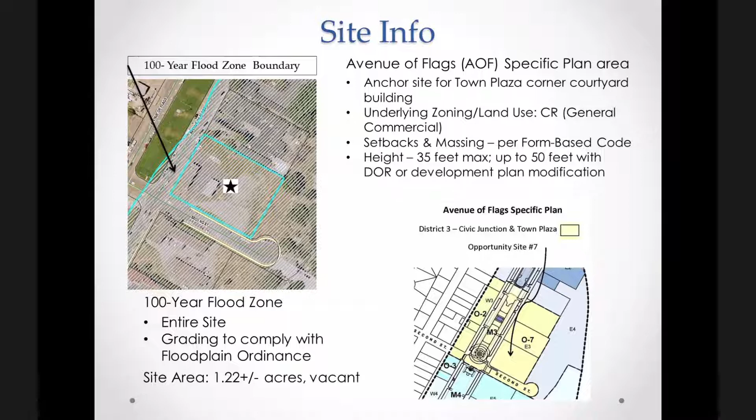So the project vision would be a commercial and residential community, providing a commercial retail presence on the Avenue of Flags targeted toward local businesses. The idea would be to serve the needs of area residents and the community as a whole, and also create quality multifamily homes with open space amenities in the form of a central courtyard, terraced roof decks, and views of the surrounding hills.

So upon our conceptual review, which is not a full review for compliance with the specific code, the project generally seems to be consistent with the Avenue of Flags specific plan and the Art Deco design style. Moving forward, we'll work with the applicant to refine those elements to ensure consistency with that plan. The project also does appear to complement neighboring developments.

Getting into project information, the project consists of 2 separate buildings, building 1 and building 2. I'll cover building 1 first. It's located immediately adjacent to the Avenue of Flags, closest to the street, and contains a corner courtyard mixed use building.

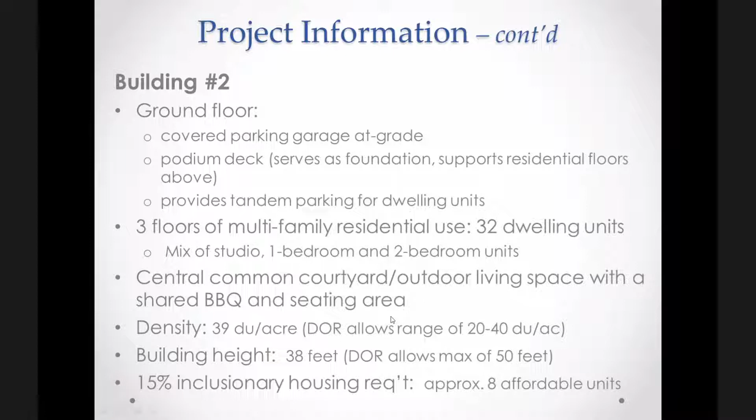The proposed density of the project is 39 dwelling units per acre. The DOR, or Development Opportunity Reserve, within the specific plan allows for a range of 20 to 40 dwelling units per acre. The building height proposed is 38 feet, while the DOR allows for a maximum of 50 feet. As for other project statistics, the 15% inclusionary housing requirement would apply, equating to approximately 8 affordable units required for this project.

Moving on to parking and access, surface parking would be provided, located behind the mixed use building fronting the Avenue of Flags, in the interior of the project and along the north and east property lines. There will be a combination of indoor garage parking in the form of tandem spaces, covered carport parking spaces with potential solar panels, and uncovered parking spaces. Per information provided by the applicant, the project would be required to provide 77 spaces for residential uses and 19 spaces for commercial uses, for a total of 96 spaces required. Again, staff has not done a detailed review for compliance with our municipal code and Avenue of Flags specific plan, but this is the information provided according to the applicant.

The project is proposing to provide 100 total spaces on site, and additionally to install 7 public parking spaces off-site, immediately adjacent to the project site on Avenue of Flags.

I'll show you that later on the site plan where that would be located, and it would be in the form of parallel street parking. The project as designed proposes 2 vehicular access points along 2nd Street. I'll show you that on the next couple slides here when I have the site plan available.

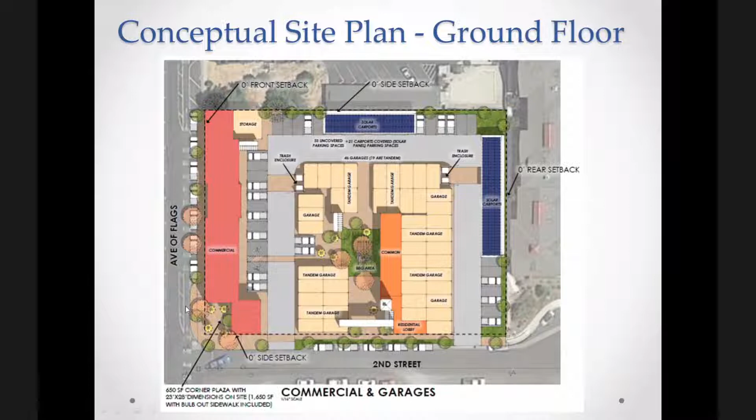So you can see in the center of building 2 the barbecue area, the public open space, and the project site does have some perimeter landscaping provided, and the corner courtyard on the corner of Avenue of Flags and 2nd Street. Let's move on to the next slide.

So here is the conceptual front elevation, the elevation you'd see if you were standing on the Avenue of Flags. I'll briefly touch on that. And the image at the bottom of the screen is a section, as if you are standing on 2nd Street, looking into the building.

I'll note a couple things here: the conceptual design as proposed does appear to attempt to complement the building approved on the Creekside Village project, which is on the other side, just south of this project across 2nd Street. You can take a look at that and what it looks like.

In terms of the section on the bottom of the screen, looking left to right: here's the Avenue of Flags, and here's building 1 fronting the avenue, with commercial on the ground floor, residential on the 2nd floor, and a roof deck on top, then the roof deck bridge connecting to building 2, and of course the drive aisle below.

So then you've got 3 stories of residential in building 2 and the garage and tandem spaces on the ground floor, moving back into the courtyard and open space for residents on the project site, and yet another roof deck provided in building 2. As you move back, you've got residential units on the 3 stories above the ground floor, with some garage space and tandem parking spaces as well.

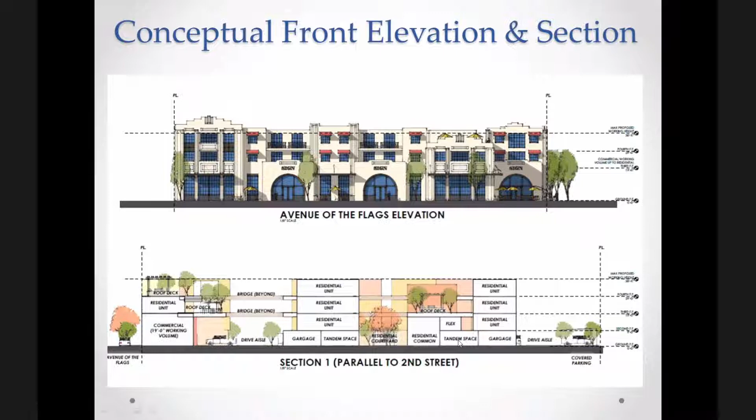So just some brief information on the Development Opportunity Reserve. As the project is conceptually proposed at this point, DOR incentives may be needed to address the increased residential density proposed above the baseline allowed, and potentially other items if applicable. Generally, some of the DOR benefits being considered include potentially contribution toward construction of Avenue of Flags specific planned public improvements and/or public benefits, and that's to be determined.

And really, the project specific terms for the DOR would be memorialized by a development agreement. If the project requires entering into a development agreement, this would require final review and approval by the City Council. So as some general information, this is the second project which would be requesting consideration under the DOR program, the first being the Creekside Village project just south of this.

So, permits and discretionary actions. The land use permit for this would be a final development plan, and a discretionary action that would also be required would be a development agreement to implement any DOR terms that would be necessary. Some potential other permits and discretionary actions, depending on the formal application we may receive, could potentially involve a tract map to subdivide the property if any of the units are intended for sale.

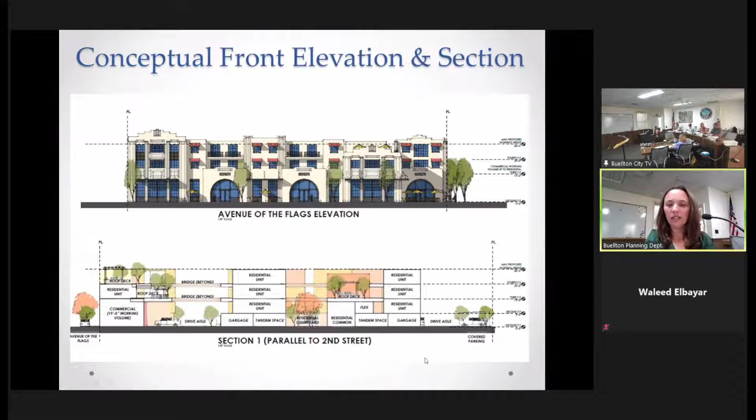My other question is about tandem parking, so I'll just turn it over to the applicant. All right, well, give me just a second here. I will share their PDF. So, let's see.

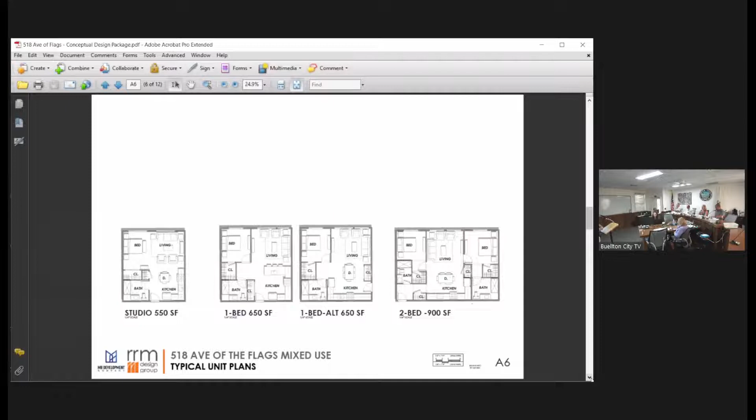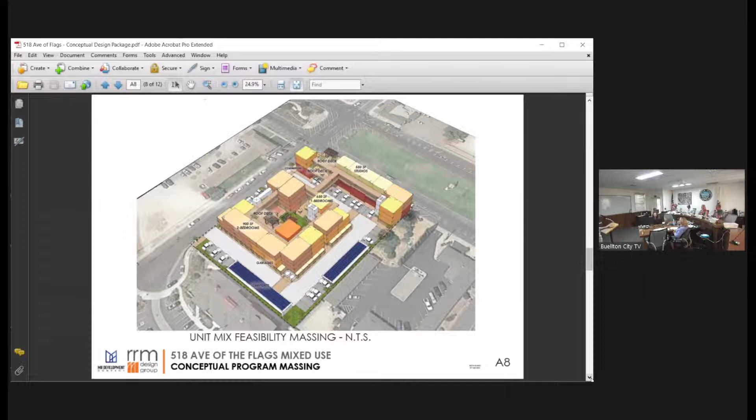You can go ahead and see that we have our outdoor plaza and also a couple opportunities where we think there might be some outdoor dining on a fairly large sidewalk. And then down on the left would be where the additional on-site or off-site parking would be. We didn't count the ones on 2nd Street for you, because they're already existing. We're not removing any, we're maintaining them.

Go ahead and hit the next slide. This takes us to our last slide before I show you the pictures. So this section really helps you see how that relates. Is everyone going to hear me okay if I walk up to the screen for you?

Under the bridge, as an architect, I have to point with my hands, I usually have a mouse or something. Right there is where we wanted to make sure that the utility trucks, I just want to make sure that was clear, because that's a really important thing when we design this. You can't just put a bridge in. You have to make sure that trucks are able to fully get all the way around, especially with our trash enclosures that meet your guys' standards in the back. We wanted to make sure that worked.

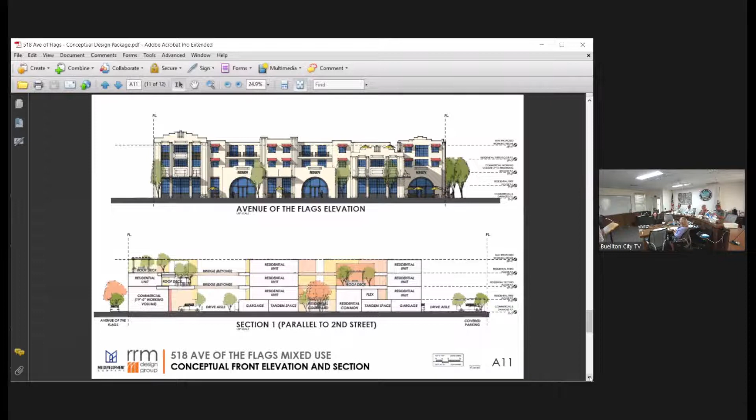We think it provides great amenities for people who want to live here. How great is it to be able to rent a 2-bedroom unit and have 2 covered parking spaces for you? We think it's a bonus rather than a negative to be able to have a tandem.

So, Brandon, I didn't know if you had anything else you wanted to say, but I feel like we've shared a lot, and I think it's probably time for you guys to have any of your questions.

I'll just quickly, before I turn it over, on the pedestrian bridges, out of curiosity, are those concrete? We'd have to look at our instructions on how we want to do them. Most likely it would have to be some kind of steel to be able to get the profiles that we need.

Because steel's so good in tensile, we're going to have to use steel. And at this stage, this is just the conceptual stage. Over the next many months, we'll be fine tuning the feedback and trying to see what actually works and gets buildable. But this is, I'd say, our first pass.

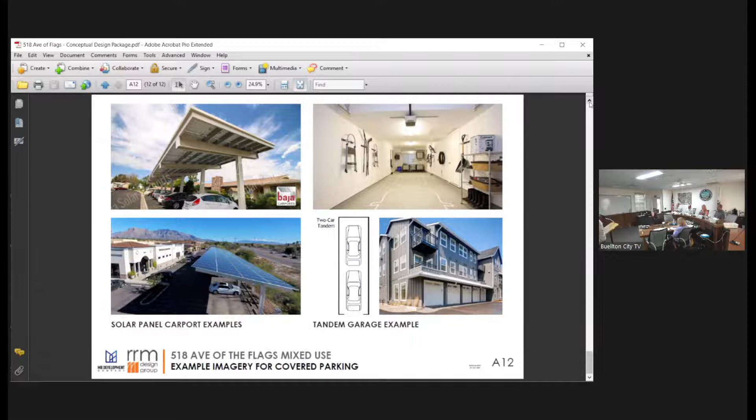We can encourage it in a couple ways. Our adaptable units should all be the closest units to that elevator. That would be our best way to do it. But otherwise, if you're grandma and you're visiting or whatever it might be, the one elevator, it's not that far of a walk across, but you're right, it would be a little bit further.

For this scale of a project though, the one elevator seemed to be the right answer.

If you look here, most of the residential units are basically centered in that second building, and there's only maybe 14 or 15 units that are above the commercial. So those units, we're almost serving 75% of the project with that one elevator all close by. We had considered potentially putting a second elevator in the back, maybe making it a private elevator for those residents, and we can still consider it. It's something we're still working through, but right now we felt the walking time and distance between everything still seemed pretty reasonable, considering how it's laid out.

And when we looked at the cost benefits, if you build two elevators, you wouldn't have to build the bridges. But when we looked at all the amenities, we'd rather build the bridges and take the money that would have gone into a second elevator, build the bridges, and make a cohesive project where each roof amenity is available to all the users. So we thought in general it actually was a positive for the project to do one elevator.

Is it on? That was the only question. This is a good question, we definitely thought through it. I'm getting older.

Commissioner, questions? So there's two sets of stairs and they're both on the insides of the residential area, but no external staircase. It's actually three sets of stairs - there's one in building 1, hitting that corner, and it's inside, then two in building 2.

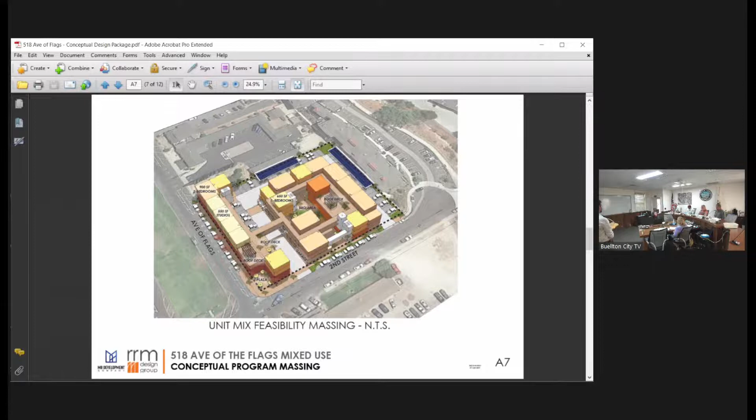I like the crown that you have on Avenue of the Flags at the top of the buildings, but why isn't Second Street using the same crown?

Can you clarify? You're talking about the far left-hand corner of Avenue of the Flags, and that crown, and then the second one. And then on Second Street, your crown is completely different—a little bit more simple, right? Just trying to create that hierarchy.

On Avenue of Flags, if you guys want us to show that same detail around that, that's something we're willing to do, of course. It's always a challenge between making sure we get everything we want and making sure the cost makes sense too. So we figured we'd put most of the cost we can on Avenue of Flags, as that will be the main visual corridor and main driver.

And then when you come off of Second Street, we kind of wanted to simplify a little bit, just to make sure it really makes the eye go to the elevation too. It's like, wow—because you really got to nitpick this thing.

You guys have done a wonderful job on all your detail work. Thank you so much, I had a lot of practice the last few years. Get out of here—thank you.

Commissioner Lee: Thank you for the presentation, very nice, very thorough. You came up with a very creative solution for this project. Architecturally, I think it's nice, looks good.

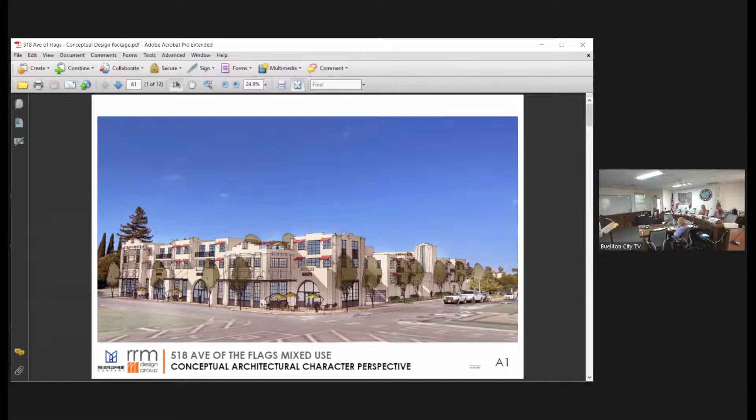One concern I have is the width of the sidewalk along Avenue of the Flags. How wide is that, do you know? I believe code states it has to be 12 feet. It doesn't look like 12 feet in the drawing, but maybe it is—it's hard to tell the massing.

In the perspectives and in your discussion, you mentioned you'd like to see outdoor seating on the sidewalk. If that's the case, I really think it needs to be wide enough to comfortably have walkers pass by with outdoor seating there. It's important not to forget the walkability factor of Avenue of the Flags. If we're encroaching all the way to that zero setback and designing something 40 feet tall, with a canopy overhanging the sidewalk, requiring people to walk underneath it, it could really be uncomfortable. I'm just concerned about the amount of space.

Okay, we'll definitely address that. Actually, one of the key things I championed for Creekside when we got the parking reduction was that I felt people are going to park on Avenue of Flags, in your guys' medians, and then actually walk around. So the walkability of these projects is very important to me. I feel people aren't going to be parking in our retail to go to the retail—they'll be parking somewhere else on the avenue or on a median and walking through all of Avenue of Flags, enjoying the shops and retail. So we will definitely take a look and make sure it's usable and workable in real life.

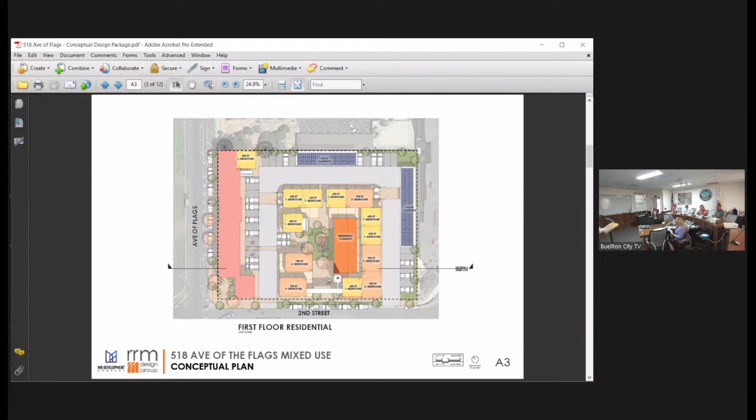Was there a green team meeting a week ago or something? Did anyone go or was absent? Zoom? Other than Zoom? Well, I think it was on Zoom. Oh, man. Yeah, okay.

So any other commissioner comments? Just nice to be back in person.

It's awesome, isn't it? I'm just going to do two little administrative reminders.